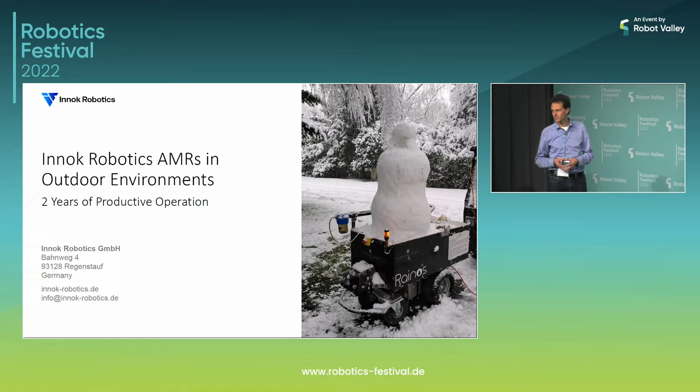On top of this platform, we also did many projects with research institutions and larger corporate customers, where we implemented different prototypes for different applications in the outdoor area.

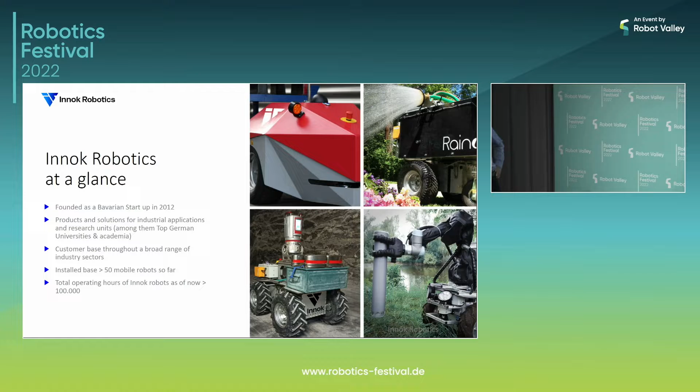About 2018, we saw that we need to bring out our own products based on this system. At this time, we had already about 40 to 50 mobile robots out there driving in different applications and at research institutions. We also developed a sophisticated software stack based on ROS, but added everything you need to make a product from that.

Especially a graphical user interface that can be used by end users, like what we see later, like gardeners or workers in industrial companies.

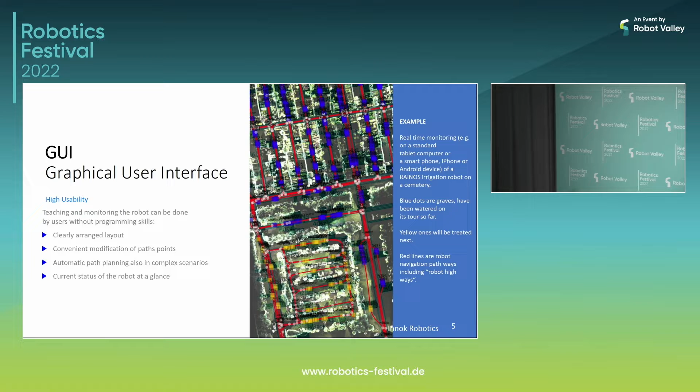So we had this platform, and on top of this platform and these custom robots, we did the Innok Induros. It's an autonomous transport robot that's traveling around at the company site, automatically coupling and decoupling trailers on fixed roads.

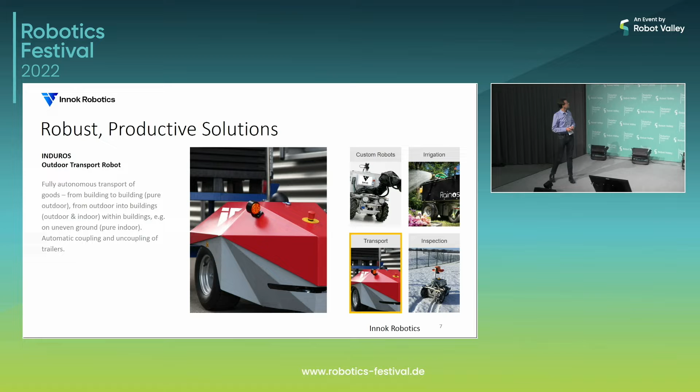Here we see the site of our first pilot customer, ZwickRoell in Ulm. And there you see this path where the robot travels many times a day. We have 3 stations on this site where the robot couples and decouples the trailers without any human interaction. It's around 800 meters long, and it is repeated 7 times each working shift.

It's 100% outdoor, so we have the possibility to drive indoor too, but in this configuration we are only driving outdoors. The payload of the trailers, we specify 350 kilograms. It's mostly limited by an inclination of 10% that we have in this area. So when the robot drives down a hill, you have too much load on the trailer, and if it's wet on the ground, the robot might slip.

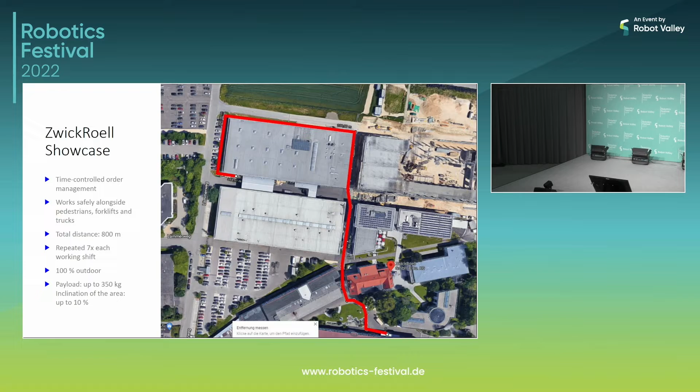Okay, then another product is the Innok Robotics irrigation robot. It automatically waters graves on cemeteries.

We didn't come to this idea on our own. We had our first pilot customer come to us and tell us about this idea, and we found that we can realize it with our technology quite well.

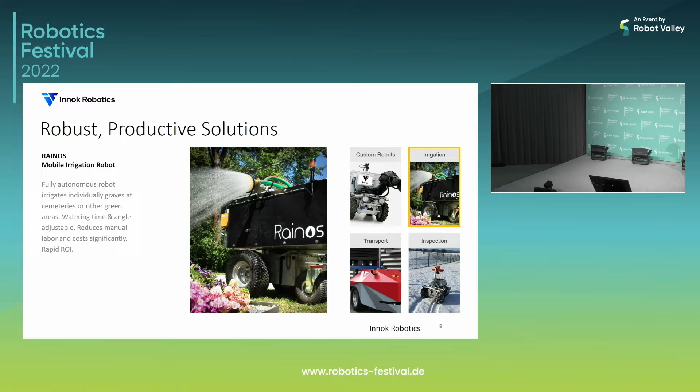Here you see one of our pilot customers. We actually have 3 pilot customers where this irrigation robot is working productively. This is the cemetery Hamburg-Rahlstedt, where the robot irrigates about 500 graves within an area of 29,000 square meters. The robot handles up to 200 graves per night.

We have about 25 irrigation iterations per year. This year was quite hot, so this year we have almost 40 iterations per year. With a maximum of 600 graves, you can calculate how many hours of personal work you save by using these robots.

Because as we've already heard here, the biggest problem is that companies don't get workers for these simple tasks today, and so they need to automate.

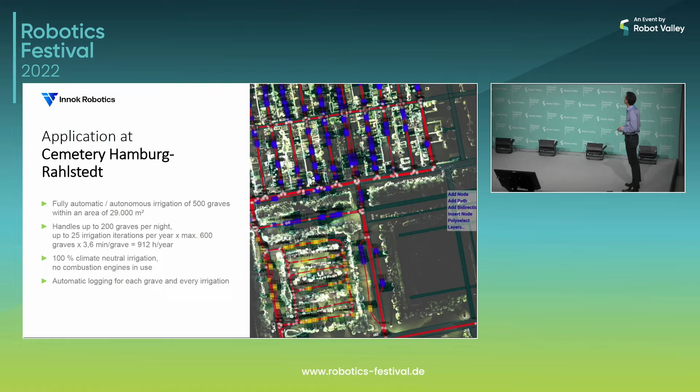Of course, we don't use combustion engines, so we say we are 100% climate neutral. You get some benefits like logging of each irrigation, and this is also a topic for our customers.

Then the third product is the Inspectos. It's an inspection robot, basically the same platform equipped with cameras and other sensors. It travels in electrical substations and takes photos. This robot was also in use every day for over a year already.

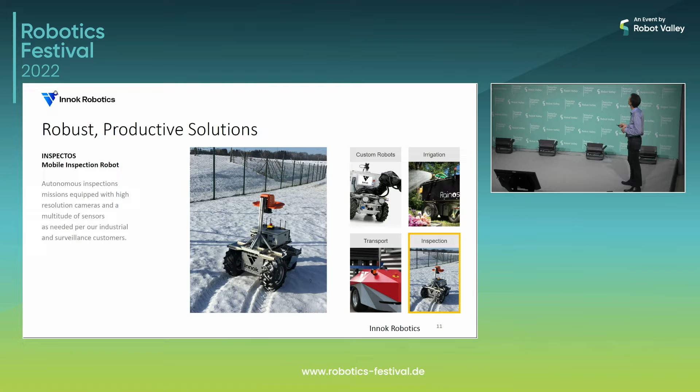So we had this experience of what happens with weather like snow, etc. When we first started with productive deployments of these products, it was like hell. We cringed in fear whenever the telephone rang, while 2 other colleagues were still analyzing raw data of sensors,

trying to figure out what was the problem of the last inexplicable incident. But we took on every problem we had. The major sources of problems were localization problems, like issues with odometry, bad IMUs, simple things like issues with TF frames in ROS, or errors in sensor fusion configuration, also small changes in environments that made problems.

Another source were false safety stops. The robot stops even if it should drive. Like from weather, like rain, but it's not simply that it is raining and the robot stops, but some special cases where rain collects on top of the robot and drips down exactly on the sensor, and this only happens at a specific location on the site with some inclination and things you have to figure out. So also wrong safety fields, or spiders finding a new home on the safety sensor.

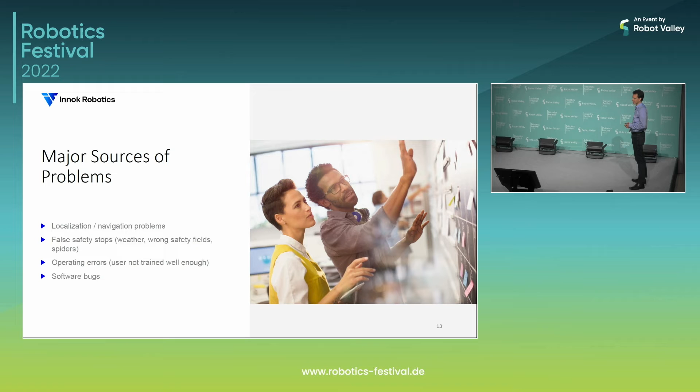Yeah, also some software bugs, of course. And day after day, week after week, month after month, we fixed more and more of these errors, of these problems. And we finally got to a state where we got another problem, and this was vegetation. It grew suddenly from one day to another, the environment completely changed.

So we started again, tuning parameters, finding workarounds, fixing everything, and we got to a state where it works every day.

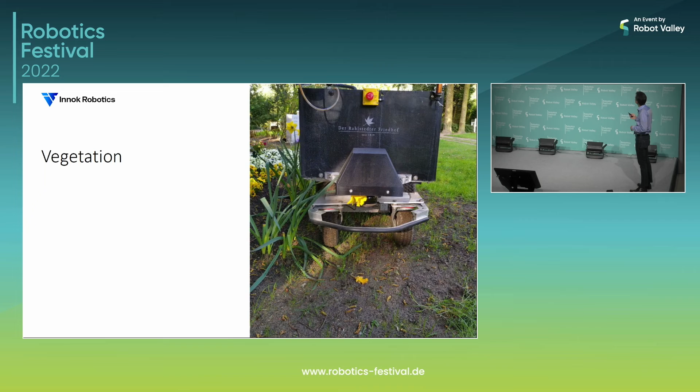So yeah, we finally managed most of that. And today we have a situation where these robots are driving productively almost every day of the year, regardless of weather, whether it's raining or we have snow or whatever.